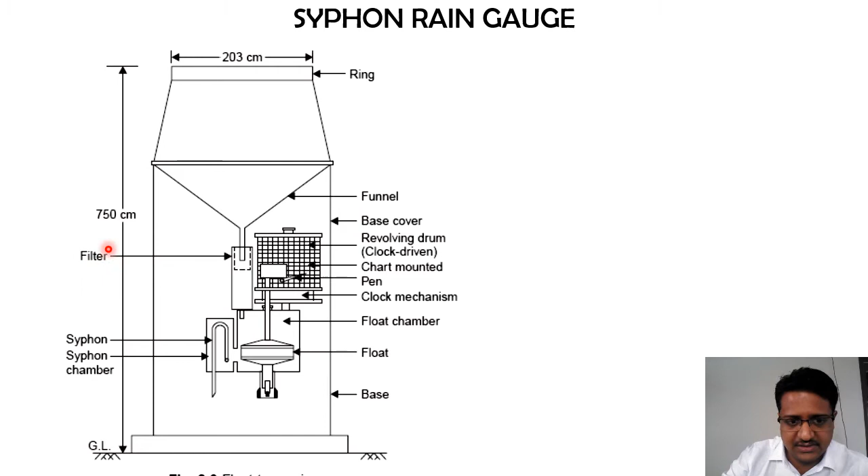Through this funnel basically the water is going to enter into this first chamber, what we are going to call the filter chamber. So we don't want any kind of debris or dust or any leaves which are floating around in the atmosphere to enter into this particular channel. So that's why we have put a filter in this siphon type of rain gauge station. This will make sure that none of the debris or any other suspended or settleable solids are going to enter into this particular chamber.

So that's why this entire chamber is called the filter chamber, and this dotted line is nothing but the filter that we are going to have. Now the water received from this funnel through the filter and the filter chamber is going to enter into something called the float chamber. Please try to listen to these. Water from the funnel will come through the filter. After filtering, it enters into one more chamber called the float chamber. Okay, so in this float chamber the water is going to stay.

Now in this float chamber we have something called a float. The simplest way I can explain this float: in your water closet or toilets, you have that flush tank. The technical name for that flush tank is the cistern. Inside that cistern, once you press the flush button, only a fixed quantity of water is going to enter into your toilet as a flushing mechanism, right?

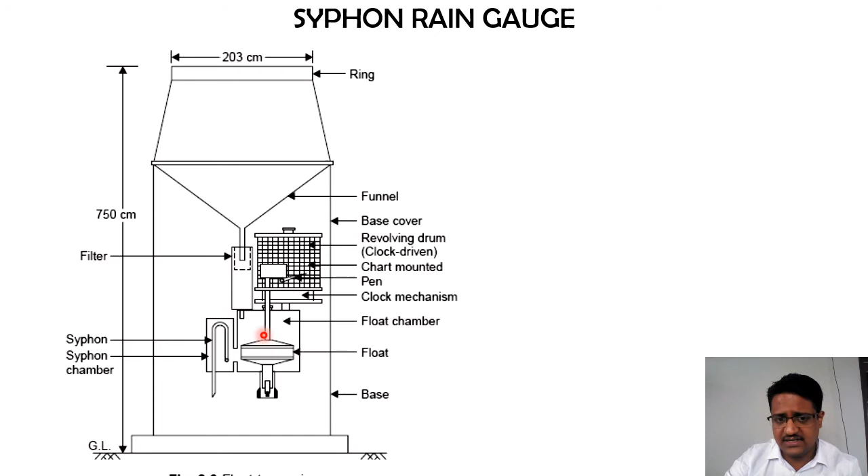Okay, so again I'll repeat, we have the receiver from where the rainfall will be collected, then we have the funnel through which the rainfall is collected, and it is passed through a filter to avoid any entry of debris or suspended particles. Then this water will enter into this float chamber, and in this float chamber we have a float, and this float is attached to a mechanism which is connected to a pen, and this pen will mark or draw a graph on a clock driven chart.

Okay, apart from that, this float chamber is connected to the siphon chamber. You can check out this opening over here. And beside we have this siphonage action chamber. So this is with respect to the construction of this siphon rain gauge station. Now the next part is how it is going to work, so let us try to explain that.

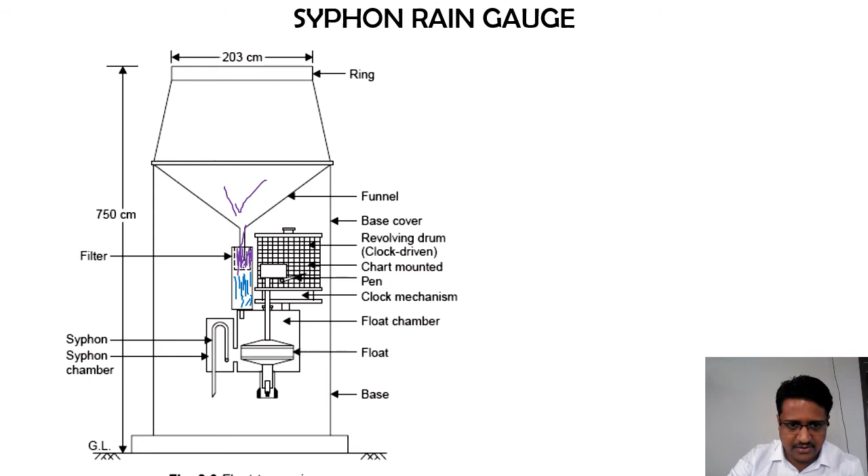Water enters from the top through this filter. So imagine this purple color line I am showing is having some impurities or suspended solids. Once it passes through this filter, the suspended particles are going to be held up in the filter, and only the remaining clear water is going to enter from this opening to this particular float chamber.

Now the next thing is, whenever the float is at its bottommost position, through the connection with the pen mechanism, this is the pen, it is going to mark at 0 on the x-axis. The x-axis will be your time, and the y-axis will be your cumulative rainfall, exactly as in the earlier case. So when the float is at its bottommost position, the pen is going to mark the 0 point on that clock driven drum. I hope it is clear.

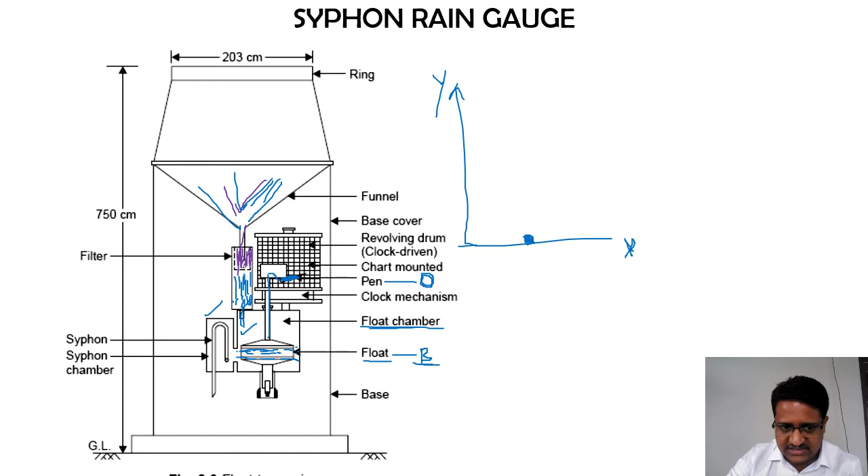Now once the water starts to be collected from this receiver and comes through the filter, the water level will start to increase in the float chamber. One more thing to remember is, since the float chamber and the siphon chamber are connected with the opening over here, the water level in the float chamber and in the siphon chamber is going to remain the same. So as the water level in the float chamber increases, the water level in the siphon chamber also increases.

Now as the float chamber starts to fill up, the float will start to move up, and this upward movement is converted into the pen movement in the upward direction. I hope I am clear. So initially if it has a marking over here, as the water starts to fill up, imagine for 50% filling of that chamber, it has marked somewhere over here.

Now as the water again fills up in this float chamber, the siphonage chamber will also start to fill up, as I have explained. So similarly the maximum level, imagine say it is over here.

Okay, so at this point, when the entire float chamber has filled up and the float is at its topmost position, imagine this is the point at which the graph or a pen is being marked out. Whenever the float chamber is full, even the siphon chamber is going to get filled up.

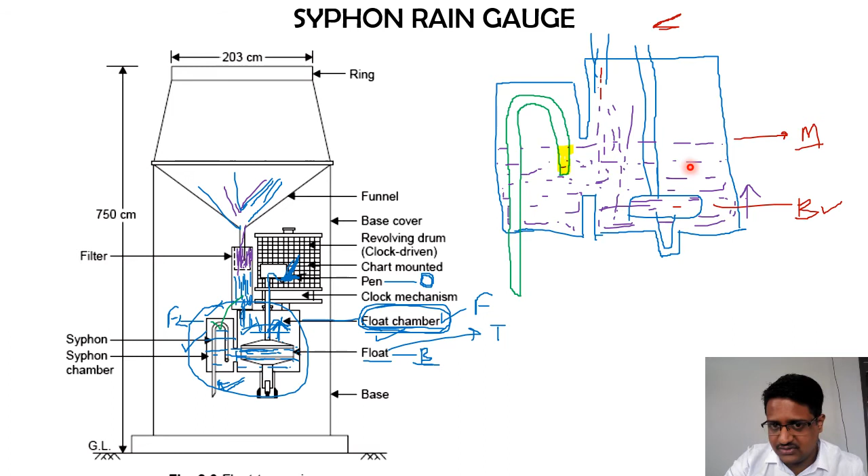So in the middle position, this amount of water has already entered into this pipe, and based on that the pen is also moving, so simultaneously all the works are going on. Now when the water increases again, let us say to full, the water in this chamber has risen up and reached the topmost position. At that point of time, the water level is going to increase to the same level even in this siphon chamber.

So now the depth of water on this shorter limb has risen to this level. I hope you are getting this. In the yellow highlighted area there is no air bubble, whereas here all the air bubbles are still existing. So here we have the air bubbles, whereas the yellow marked area is entirely filled with water.

So one condition you can check out here is the topmost position. The topmost position of this float will be in line with the topmost position of the siphon pipe. It is constructed in such a way that the topmost position of the float in the float chamber equals the topmost height of this siphon pipe. So once the topmost position in the float chamber is reached, it indicates that in the shorter limb the water has reached its topmost position. Once this float chamber is completely filled up, what will happen?

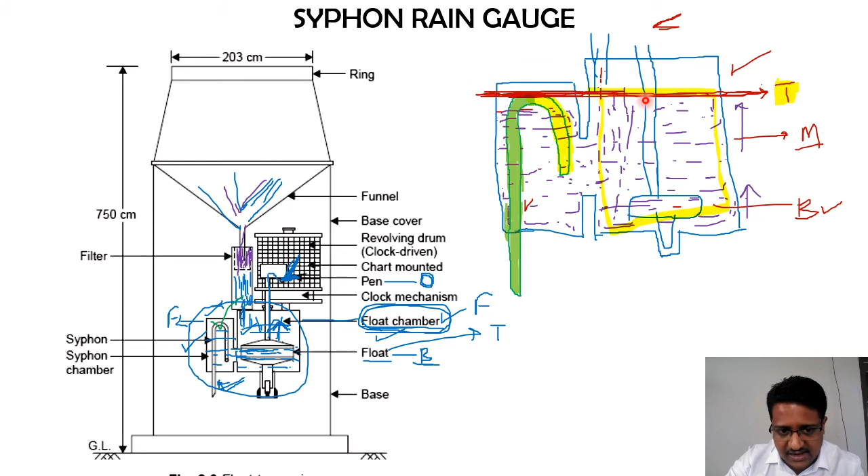So that's why once the topmost position is reached, the water inside this lower limb of the pipe will also reach its topmost position. And once it reaches its topmost position, because of the gravitational force, the water which is there on the top portion starts to fall down. Whenever it starts to fall down, again it is creating a vacuum over here, as you are sucking the water from that water tank inside the pipe, right?

So how that vacuum is created: this entire yellow colored liquid which is already there on one side, as and when it starts to fall on the other side with the green color that I have indicated, it creates a vacuum, and because of this vacuum, the water which is already there in the float chamber as well as the siphon chamber will start to enter inside this particular lower limb.

So all this water will start to enter into this lower limb, and once this particular flow starts, till the water goes below this particular point, below the opening point, the water is automatically going to get discharged. I hope I am clear for you. I'll repeat this once again.

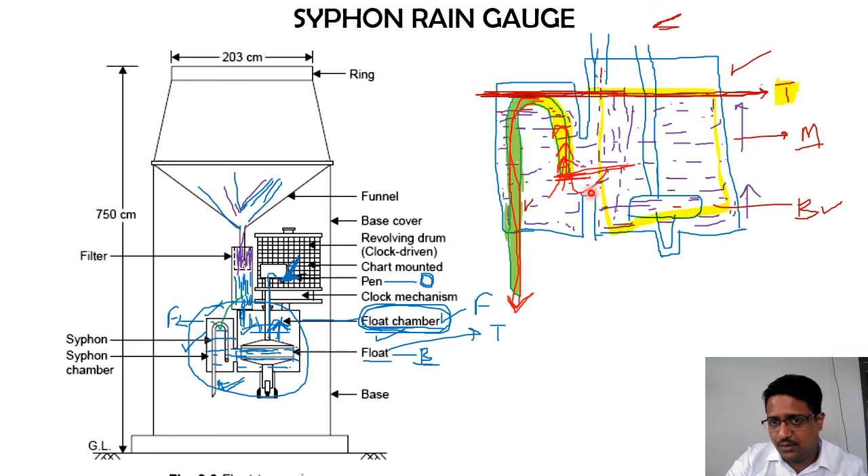Because of the suction or vacuum that is being created by the falling of this water from the downward limb, all the water in the float chamber as well as in the siphon chamber will start to enter from this lower or shorter limb of the siphon, because of which all the water from here will enter and ultimately exit from this point.

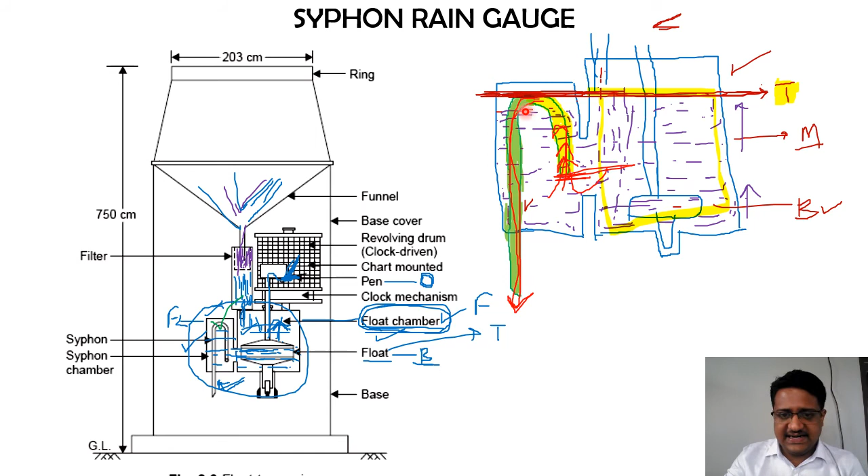Now once it exits, the water will continuously flow into this particular siphon until the water level inside both chambers, whether the float chamber or the siphon chamber, comes below the entry point of this. Once the water level comes below this entry point, the air will enter from this lower limb. And once the air enters, this vacuum will be cancelled out, and because of that the water flow over here will be stopped. I hope I am clear.

Once the siphonage action starts, it will continue till the water level inside the float chamber and the siphon chamber goes below the entry point of this short limb. Once the water level goes below that, the air will enter into this shorter limb, and because of this air entering, the entire vacuum will be lost, and in turn the water exiting from this particular tank will be stopped, right?

So now with respect to this, what actually happens to the graph, let us check out. If I just try to draw this, just a minute. Now, if I think of the graph, how it is going to be, just check this out. Here is my x-axis, here is my y-axis, and initially, whenever the float chamber is empty, I am going to have my pen marking towards the bottom. Whenever it moves up, I have some medium position, and then I have the topmost position whenever it fills up completely.

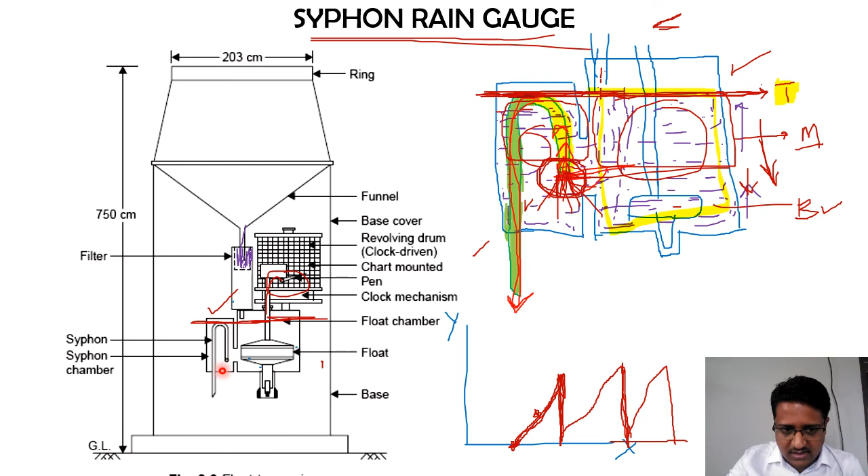Okay, so here what will happen, as and when the float comes to its downwardmost position, at that time automatically the air will enter into this pipe. In turn, it is going to cause the siphonage action to stop. So this is how basically the entire siphon rain gauge station is going to work. Okay, so this is quite an important one which helps us to even empty that content. So there is no need for a person to go there regularly to check these particular things.

Now here if you check out, if the rotation of the drum is fixed at 6 months or a year, then irrespective of whatever quantity of rainfall is occurring or being collected, this will continuously operate. Okay, this will continuously come like this. So based on how many times this is going to get emptied, that many straight lines are going to be there in that rainfall mass curve. So if you add up all these things, ultimately you are going to get the total mass curve for the selected period from this rain gauge station. Okay, this is about the siphon rain gauge station, and let us check out a bit of the theoretical aspects for these.

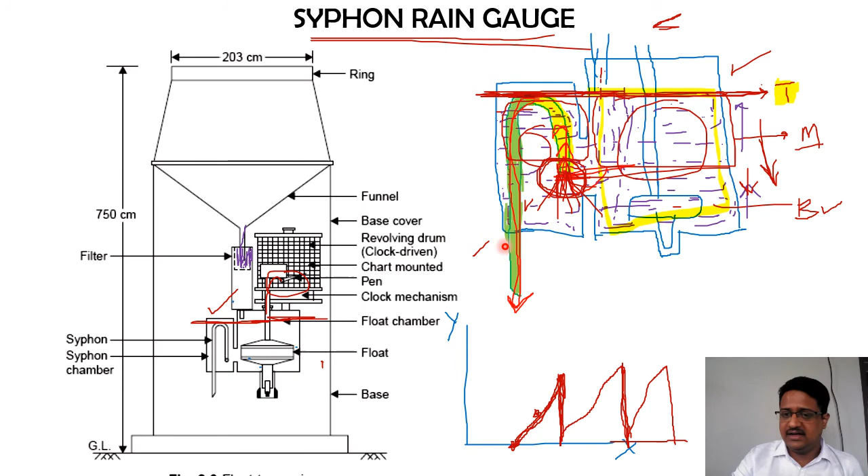In this type, as the rain is collected in the float chamber, the float moves up, which makes a pen move on a chart wrapped round a clock-driven drum. Okay, as I said, as the float moves, it is connected to a pen, and that pen moves on that particular drum. When the float chamber fills up, the water siphons out automatically through a siphon tube kept in an interconnected siphon chamber. So the float chamber and the siphon chamber are interconnected with each other.

The clockwork revolves the drum once in 24 hours. So that can be changed. Okay, so you can have that for 24 hours, for a day, for a week, for a month, for 6 months, for a year, for a season. So based on that, you can basically have all these things there. The clock mechanism needs to rewind once a week when the chart wrapped around the drum is replaced. This type of gauge is usually used by IMD. So IMD is the Indian Meteorological Department.

So here also, once that particular time set you have done, whether it is a week, month, or whatever it is, then you need to reset that clock so that again the same continuous process is going to be there for the next cycle.

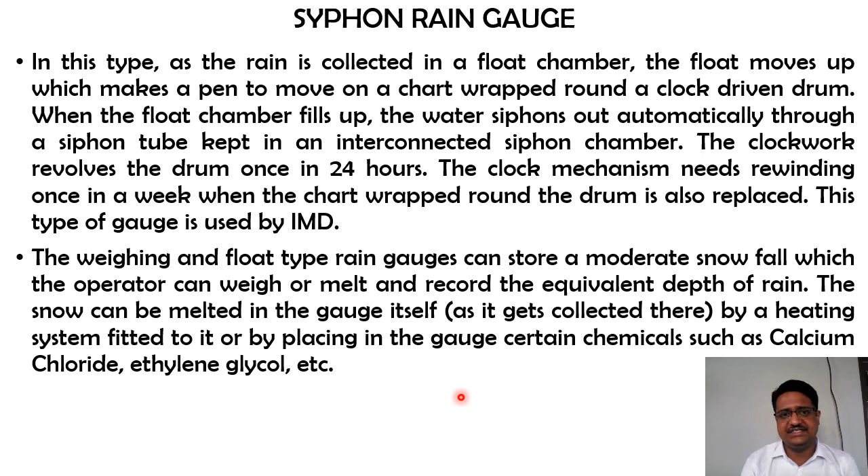The weighing and float type of rain gauge can store moderate snowfall, which the operator can weigh or melt and record the equivalent depth of rain. So as I said, an operator can do that, or you can put some antifreeze liquid into it so that automatically that ice or snow will melt into liquid. The snow can be melted in the gauge itself as it is collected, by a heating system fitted or by placing certain chemicals in the gauge such as calcium chloride, ethylene glycol, etc. So these are nothing but the anti-freezing agents I have just told. So based on that, basically your entire siphon rain gauge station works. Okay.

Fine. Now let us see how these graphs are going to be. So this is nothing but a rainfall mass curve or a rainfall graph that you are going to get from this siphon rain gauge station. As you can see, on the x-axis we have time, on the y-axis we have cumulative rainfall. Here also you can see a recording of a natural siphon type of rain gauge, and here it is millimeters of rainfall. On the x-axis it is time, in hours.

First let me explain with respect to the bottom figure, then I'll go to the top. At time t equals 0, when there is no rainfall or when you have recently reset the system, the reading pen will be at 0. As the time continues, here it is in terms of days, they have given it for 8 days, the pen will start to mark on this as the float chamber starts filling up, and this line is going to get created.

Since the clock is driving the drum, the pen will usually be fixed in its own place, it can only move up or down, but since the chart is rotating, this graph is going to be observed. Because of that, as the rainfall is collected, the rainfall data is going to be measured and represented over here.

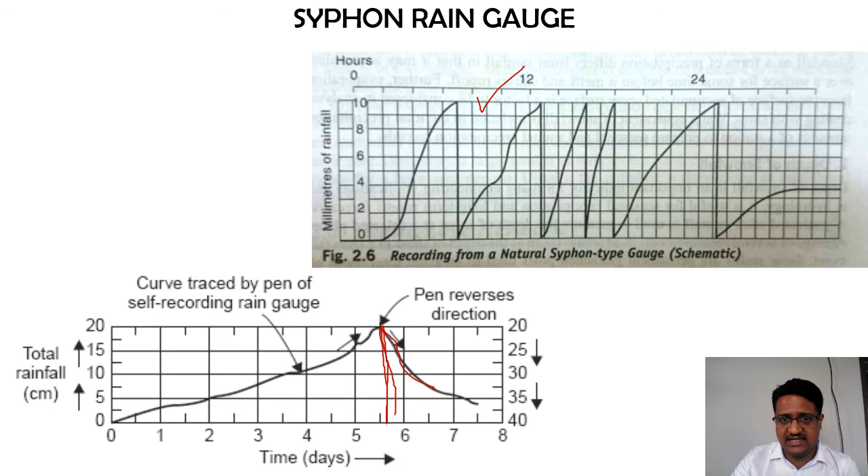So usually this graph will not come like this, it will be a vertical line as you are seeing in the top portion. So this is basically how that graph is going to work out.

Similarly, if I check out the top portion over here, it is only for 24 hours, 0 to 24 hours, but if the amount of rainfall occurring is very much, whenever you reset it, again it will start and reach its maximum. Here 10 mm is the maximum limit as per this graph. Once 10 mm of water is collected, it is going to come back down, and again you are going to have your second cycle, and again come back down.

Here you can check out, for the initial cycle it has taken some more hours, let us say some 6 or 7 hours. For 10 mm of rainfall to collect, it took around 7 hours, whereas the second cycle took only about half; sorry, within some 5 hours, if I need to say, this cycle has completed. That is, 10 mm of rainfall has been collected over here.

Similarly, if I go for the third cycle, this is only 4 hours, and for the fourth cycle it is only 2 hours. So basically, based on the intensity of rainfall, once the float chamber is filled up, automatically it is going to get emptied. As more rainfall is there, more vertical drops are going to be there.

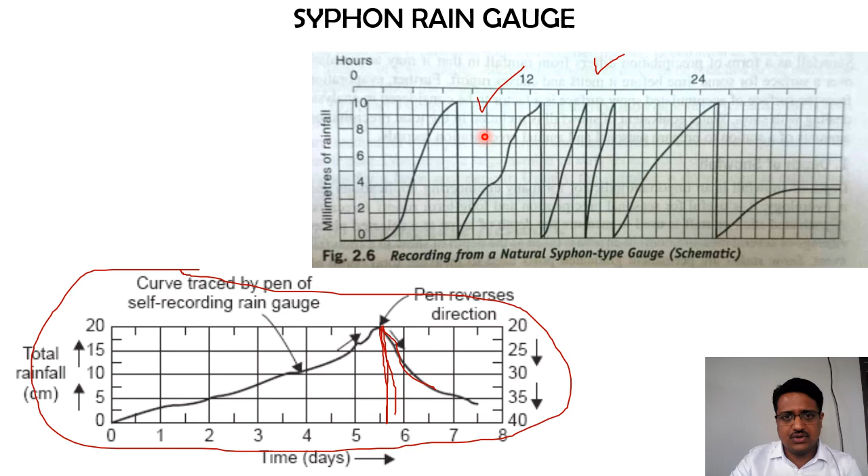So this is basically how the graph is going to look for a siphon type of rain gauge station. Again, the graph you are seeing is nothing but the rainfall mass curve. In detail we are going to check it out in further classes; I have a specific topic for that. So this is regarding the siphon rain gauge.